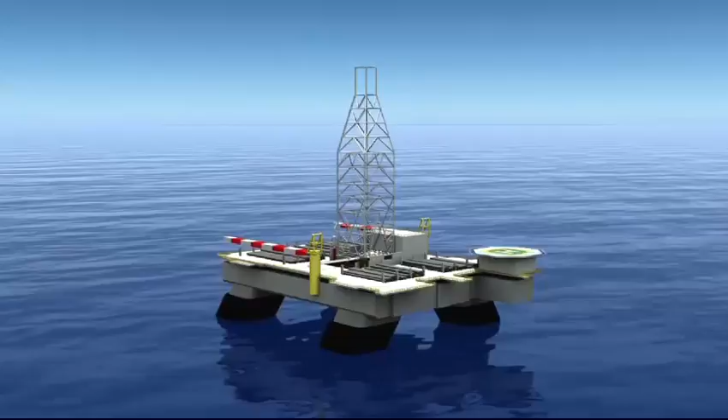This video summarizes the findings and analysis of this investigation team. As I review these, it's important to keep in mind the goals of the investigation. Our team was assembled immediately after April 20th in order to identify the critical factors underlying the accident.

Our mandate was to determine what happened so that BP could take whatever steps necessary to prevent a similar accident from ever happening again. Our purpose was not to apportion blame or liability, but rather to learn, recommend areas for improvement, and share our lessons with others.

While I believe we had sufficient evidence to reach the findings summarized here, our work was limited by a lack of direct access to some witnesses and to certain physical evidence. I will be presenting our findings factually, but it's important to note that our purpose was not to create a record that would serve as the definitive or final word on what happened.

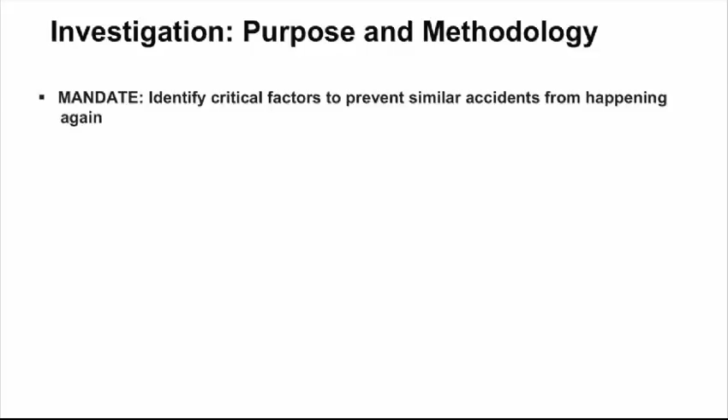The investigation team consisted of more than 50 internal and external engineering specialists with expertise in various aspects of deepwater drilling and exploration. We worked over a 4-month period examining all available evidence.

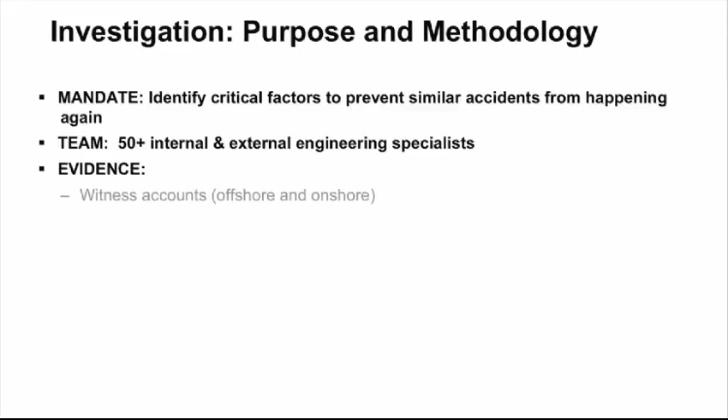This visual portrayal of our key findings is best viewed in the context of the report, which describes more fully the basis for findings. The findings were based on witness accounts, analysis and modeling, as well as engineering drawings, real-time data from the Deepwater Horizon, physical evidence, and testimony gathered from governmental inquiries.

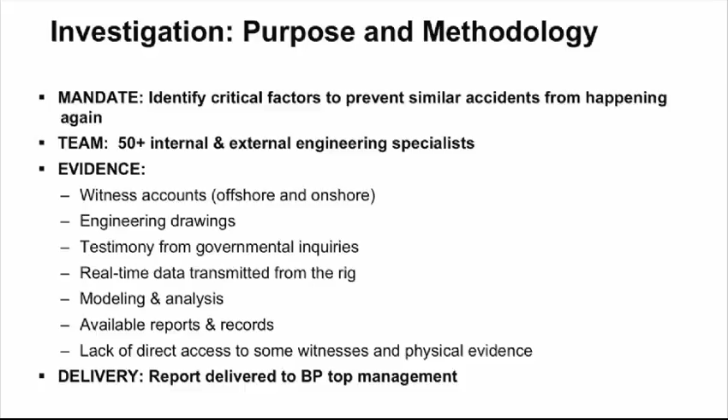The team's report was delivered to the board and BP's top management. They are sharing it publicly in order to keep the public informed, to assist with the government's various investigations, and to ensure that BP and the industry can learn from the accident and take appropriate actions going forward.

To determine what led to the tragedy, it's important to first understand the events that occurred aboard the Deepwater Horizon leading up to the accident.

This short animation depicts the best understanding the team was able to reach about the chronology of key events as we understand them today. This is an animated reconstruction of the tragic accident aboard the Deepwater Horizon on April 20th, 2010. This narrative has been developed to illustrate what we determined were the key events related to the accident. The animation contained in this narrative is representative and for illustrative purposes only, and has not been drawn to scale.

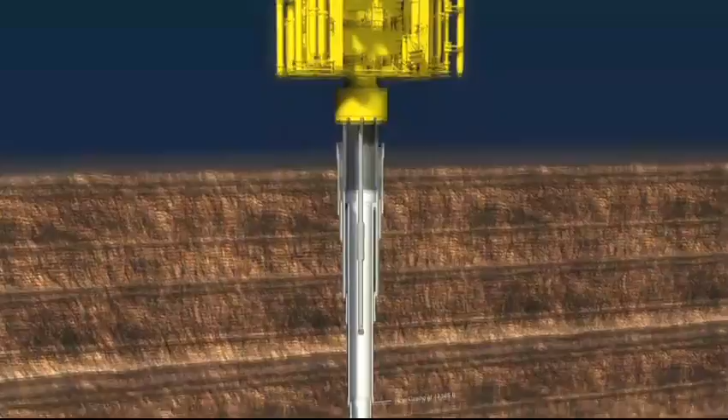The Deepwater Horizon was a dynamically positioned drilling vessel whose construction was finished in 2001. It was designed to drill in water depths up to 10,000 feet. The vessel arrived on the Macondo location on January 31st, 2010, to finish the exploratory well that had been started earlier by its sister vessel.

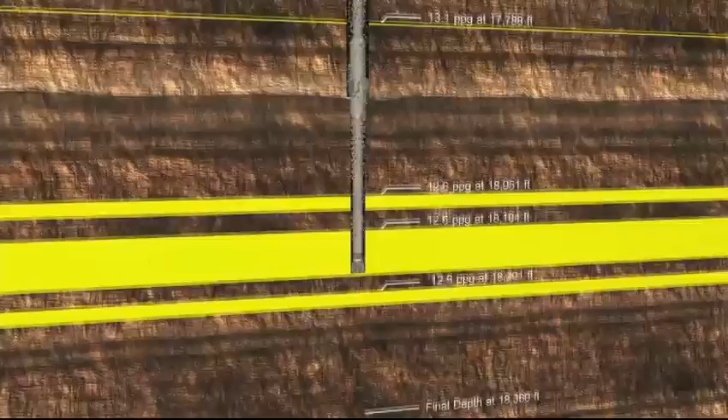The riser and the BOP were installed successfully. 4 casing strings were installed over a 2.5-month period. Our narrative begins on April 9, 2010. The final hole section of the well was drilled to a total depth of 18,360 feet. The long string production casing was installed.

During the afternoon of April 19th, the cement job started. Cement is used as a barrier to seal the wellbore from the reservoir sand. Nitrified foam cement was pumped into the annulus and non-foam cement was pumped into the shoe track. At this point, the pump pressure was bled off, and it appeared that the check valves in the float collar were holding. It's now the morning of April 20th.

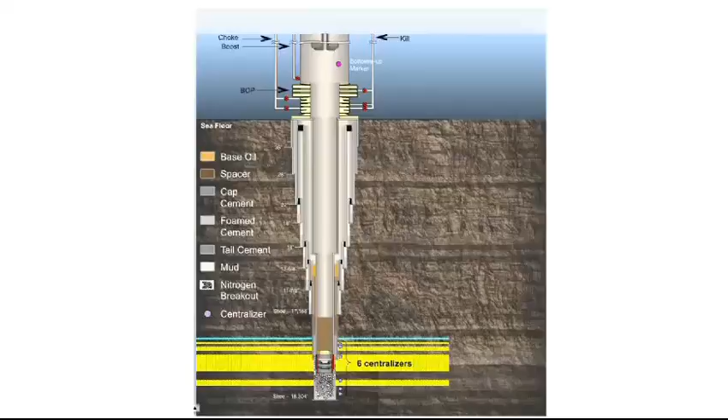The wellhead seal assembly was installed and tested. A positive pressure test, which is the first integrity test of the well, was conducted by closing the blind shear rams and applying 2,700 psi of pressure. The test confirmed integrity of the blind shear rams, the seal assembly, casing, and top wiper plug. The shoe track, which also plays a key role in isolating hydrocarbons, is not tested because of the presence of the top wiper plug. It's now early afternoon.

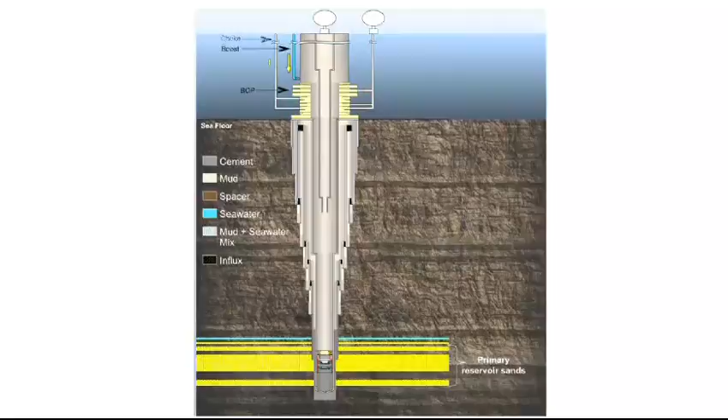The drill pipe was run to 8,367 feet in preparation for the negative test, which was the second test of the well's integrity. The test's purpose was to place the well in a controlled, underbalanced state to test all mechanical barriers. It was conducted by displacing some of the mud in the well with a spacer followed by seawater.

After displacement, the upper annular preventer was closed. An attempt to bleed the system down to 0 psi was made, but fluid in the riser was leaking past the annular preventer.

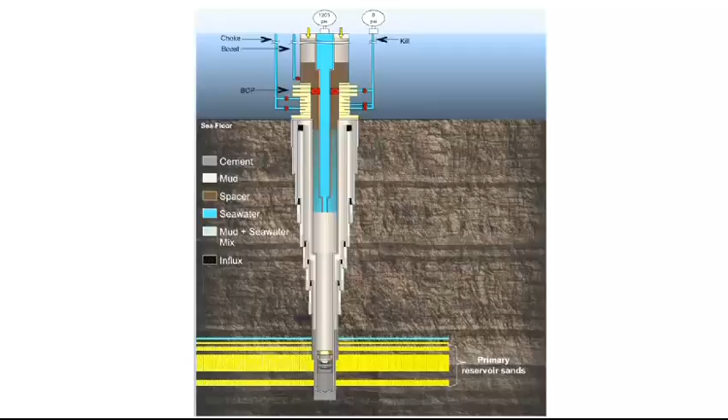It's now 1708. The hydraulic closing pressure for the annular preventer was increased to 1900 psi in order to create a tighter seal against the drill pipe. The riser was filled with an estimated 50 barrels of mud to replace the volume that had leaked past the annular. At 1727, the drill pipe valve was opened and the pressure reduced to 0 by bleeding off 15 to 23 barrels of seawater. It's now 1735.

The well site leader advised the rig crew that the negative test procedure needed to be conducted on the kill line to meet permit requirements. The drill pipe valve was closed and the testing reconfigured for flow to be monitored on the kill line. At 1752, the kill line valve was opened.

Based on eyewitness accounts, somewhere between 3 and 15 barrels of seawater were bled off. The kill line valve was closed and the drill pipe pressure gradually increased. It's now 1842. Seawater was pumped into the kill line to confirm that it was full. The kill line was routed to the mini trip tank, and less than 1 barrel was bled from the kill line. The flow stopped. The kill line was monitored for 30 minutes and showed no flow, but the drill pipe pressure remained at 1400 psi.

A discussion about the source of the 1400 psi took place. It was explained as a phenomenon called the bladder effect. The test was deemed successful.

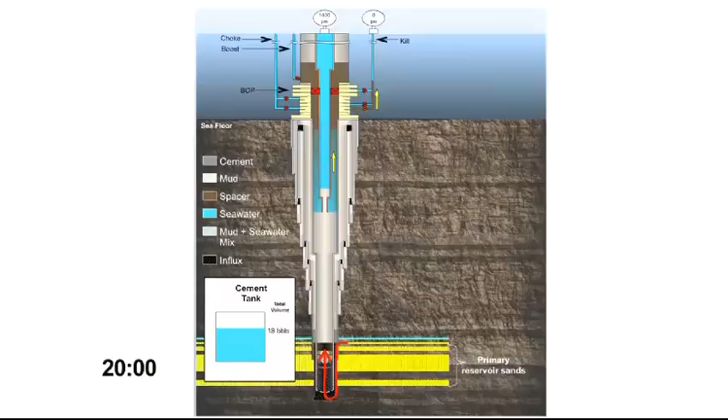It's now 2000 hours. As part of the normal operations to temporarily abandon the well, the crew began to displace the remaining drilling fluid with seawater. To start this operation, the annular preventer was opened and the well returned to an overbalanced condition, preventing further influx into the wellbore. The displacement continued as planned and the well went underbalanced at 2052.

This means the pressure in the well dropped below the reservoir pressure. The well started to flow. It's now 2101. The crew was emptying the trip tank, which likely masked any flow indications on the flow meter.

At this point, with constant pump rate, pressure should have declined as the heavier mud was being replaced with lighter seawater. Instead, drill pipe pressure increased by 100 psi, indicating a problem with the well. Analysis of real-time data shows that a 39-barrel gain was taken by 2108.

It was then time for the sheen test on the spacer, which is done in order to check that there is no free oil in the fluid that will be discharged to the sea. The pumps were shut down when the spacer reached the surface. A sheen test was performed, and the spacer was determined to be suitable for discharging overboard.

The drill pipe pressure increased by 246 psi in 5.5 minutes while the pumps were off. The fluid returned from the riser was routed to the overboard dump line. During this period, our modeling suggests that the well was flowing at an estimated 9 barrels per minute.

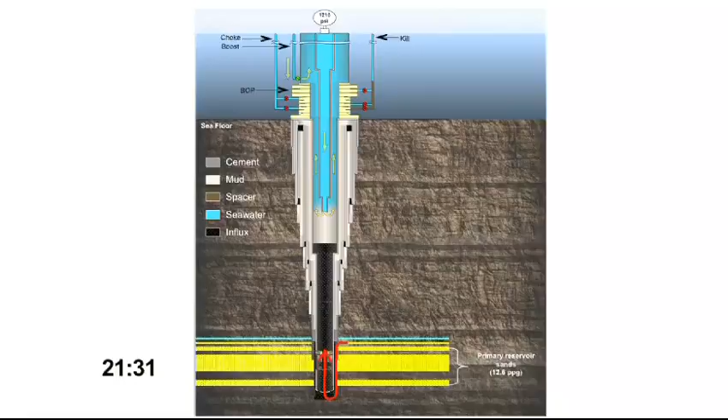Displacement of the mud with seawater resumed at 2114. It's now 2131. All mud pumps were shut down. An estimated 300-barrel gain has been taken. Over the next 5 minutes, the drill pipe pressure increased by 556 psi.

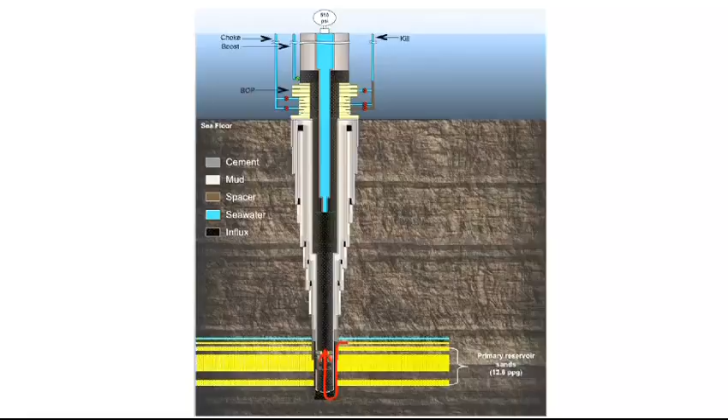Rig personnel discussed the differential pressure on the drill pipe. In the next 2 minutes, it appears an attempt was made to bleed the drill pipe, possibly to investigate the differential pressure. Over the next 20 minutes, a series of critical well control events occurred, ending in the order to abandon ship. It's now 2140.

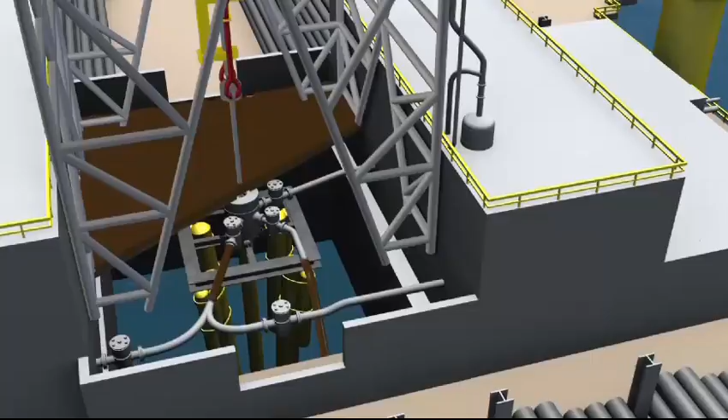Mud overflowed onto the rig floor. A minute later, the mud shot up through the derrick. The diverter was closed and flow was diverted to the mud gas separator.

At about the same time, the rig crew appeared to close an annular preventer and drill pipe pressure increased steadily from 338 psi to 1200 psi over a 5-minute period. Mud and hydrocarbons discharged onto the rig and overboard.

Activation of the annular preventer appears to have failed to seal the annulus. It's now 2147. The first gas alarm sounded. A cloud of gas spread, setting off other gas alarms. There was a roaring noise and the vessel vibrated.

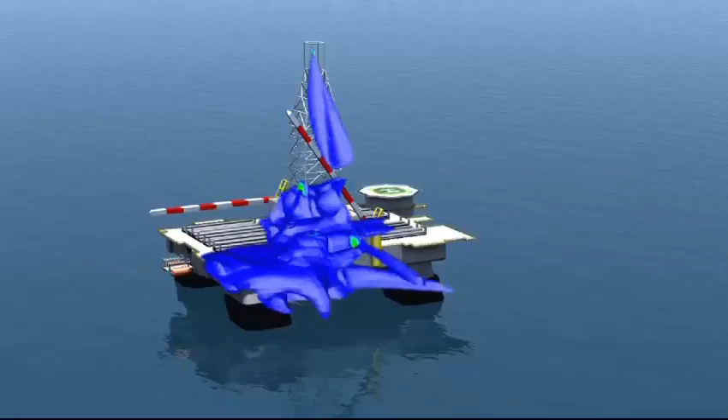The drill pipe pressure rapidly increased to 5,730 psi, which is thought to be the result of the BOP sealing around the drill pipe, likely after activation of the variable bore rams or the annular preventer fully sealing.

1 minute later, the combustible gas cloud reached the aft starboard quadrant of the main deck and probably entered the air intakes for the engine room. Gas also dispersed under the deck and into the engine room enclosures. The main power generation engines went into overspeed.

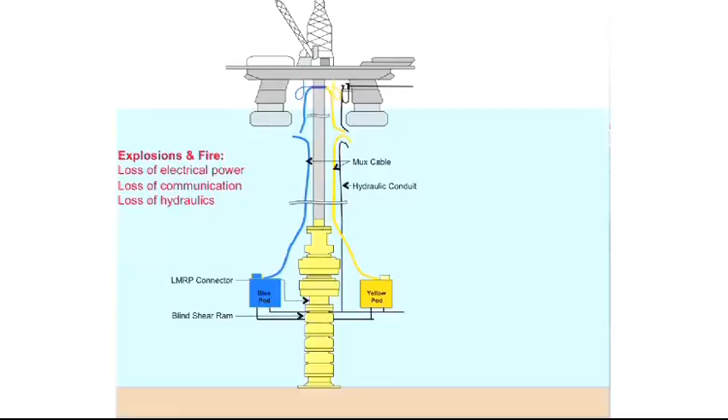Within another minute, electrical power was lost and there were 2 explosions. The first occurred at about the same time as the power loss. The second occurred an estimated 10 seconds later. The second explosion appears to have taken place under the main deck in the aft starboard quadrant of the rig.

The associated blast pressure wave traveled forward and caused extensive damage to the starboard side, potentially damaging the MUX cables, which allow the vessel to communicate with the BOP. The hydraulic line which powers the BOP may also have been damaged. The fire and explosions may also have caused damage to the surface drill pipe equipment, resulting in hydrocarbons flowing to the surface through the drill pipe.

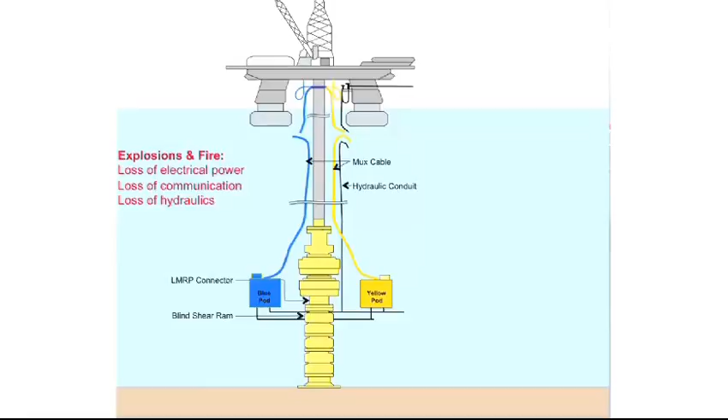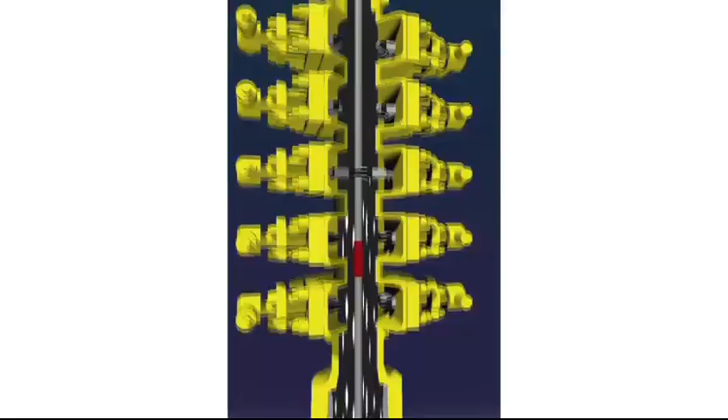The valve on the drill pipe was left open, exposing surface components to high shut-in pressure. While the BOP had closed around the drill pipe, it did not seal the well, and the subsequent loss of power may have resulted in the rig drifting off station. The drifting rig may have broken the BOP seal around the drill pipe and allowed hydrocarbons to continue to flow up the riser. One or a combination of these events ultimately allowed the fire to be continually fed.

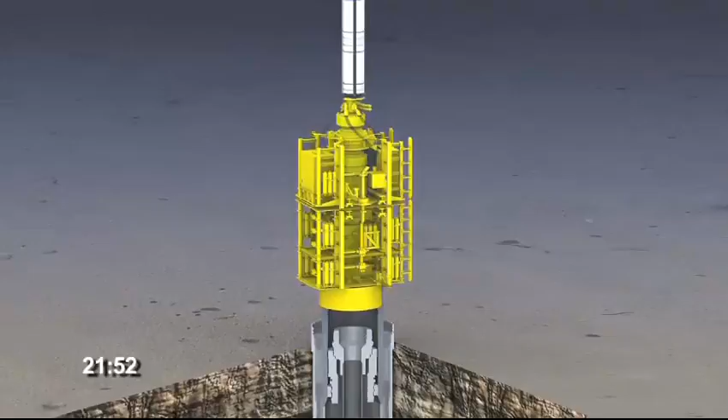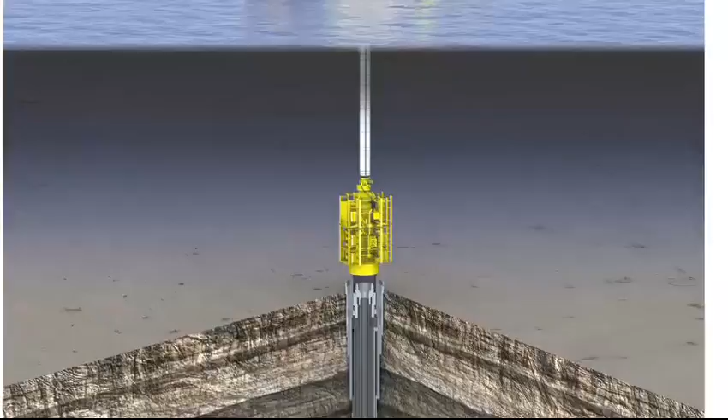It's now 21:52. Over the next 5 minutes, personnel attempted to shut in the well and disconnect the lower marine riser package from the BOP stack. The emergency disconnect sequence for the BOP was activated from the bridge. While lights changed on the control panel, no flow was observed on the flow meters. It appears that the emergency disconnect system did not function. The lower marine riser package failed to unlatch from the BOP, and the BOP did not seal the well. With the Deepwater Horizon unable to disconnect from the well, the order to abandon ship was given at 2200 hours.

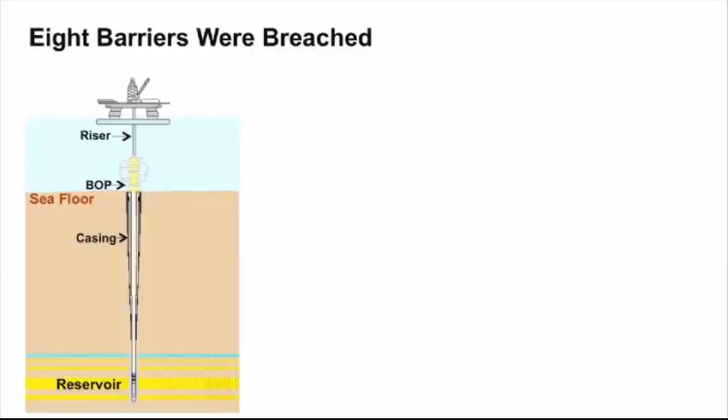This animated chronology has shown what we believe happened. Now we'll turn to an analysis identifying the contributing factors. As you'll see, we concluded that there was no single action or inaction that caused the accident. Instead, we found that there were 8 interrelated and contributing factors that led to this tragedy.

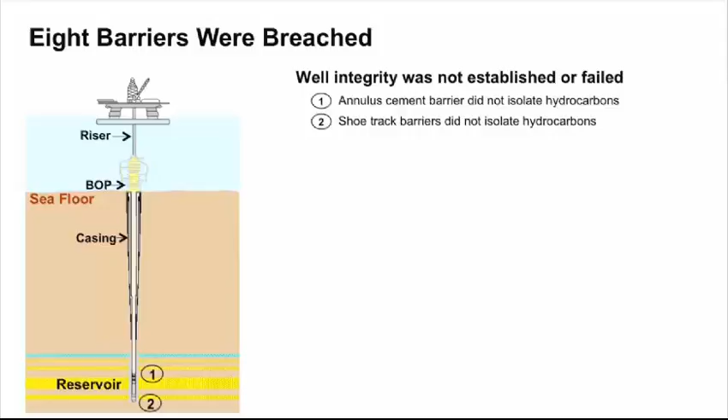The first 2 findings of the investigation relate to hydrocarbons entering the well. We believe that the evidence shows that both the annulus cement barrier and the shoe track barriers did not isolate the hydrocarbons, allowing them to flow up the wellbore.

The next 3 findings stem from evidence that the rig crew did not observe or recognize that hydrocarbons had entered the well before appropriate steps could be taken to contain them. The negative pressure test conducted in order to confirm well integrity was incorrectly accepted. An influx of hydrocarbons was not recognized until it was too late to prevent the hydrocarbons from reaching the surface because they had already entered the riser. And well control response actions failed to seal and regain control of the well.

Our 6th and 7th findings relate to evidence that hydrocarbons came up through the riser and were dispersed across the vessel, creating the conditions for them to ignite. We found that the well flow was diverted to the rig's mud gas separator, causing gas to be vented onto the vessel rather than being diverted overboard. Then, the vessel's fire and gas system did not prevent hydrocarbon ignition.

Our 8th and final finding was drawn from evidence relating to the blowout preventer. With the loss of well control and subsequent explosions and fires, the BOP did not seal the well. Each of these findings is explained in greater detail throughout the remainder of this presentation.

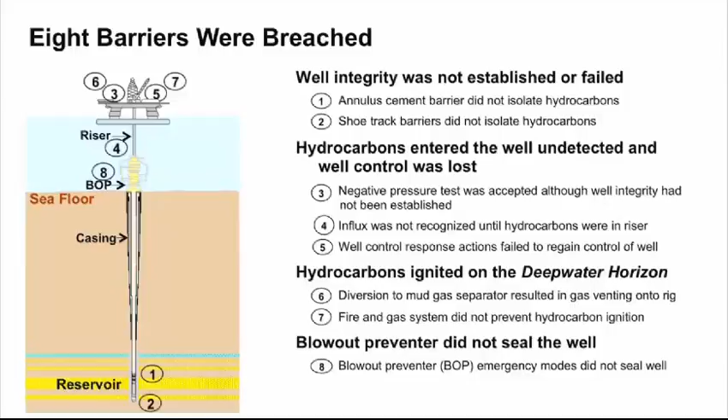Our first key finding relates to the cement job. BP relied on the expertise of Halliburton, the cementing services provider, to recommend a cement slurry appropriate for this well. The BP team was responsible for assuring Halliburton's work and accepting its proposal.

It was clear from the event that the cement did not isolate the hydrocarbons. The challenge facing the investigation team was to determine what happened without access to actual samples of the cement slurry used in the Macondo well. Therefore, we had an independent laboratory analyze the slurry design and also create and test samples based on that design.

Through our investigation of the cement job, we noted the following critical items. First, the high percentage of nitrogen in the foam cement made it difficult to create a stable foam slurry. Second, there were no fluid loss additives used in the entire cement slurry. Third, a relatively small amount of cement was pumped in relation to the displacement volume, increasing the likelihood of cement contamination. And fourth, Halliburton did not conduct comprehensive lab tests that could have identified potential problems with the cement.

The independent laboratory constructed representative cement samples based on the slurry design and demonstrated that cement stability could not be achieved. Therefore, we've concluded that the foam slurry likely experienced nitrogen breakout, resulting in nitrogen migration, slurry contamination, and incorrect cement density. Our investigation of the cement job also included an analysis of BP's decision to use 6 centralizers and a long string production casing in the well.

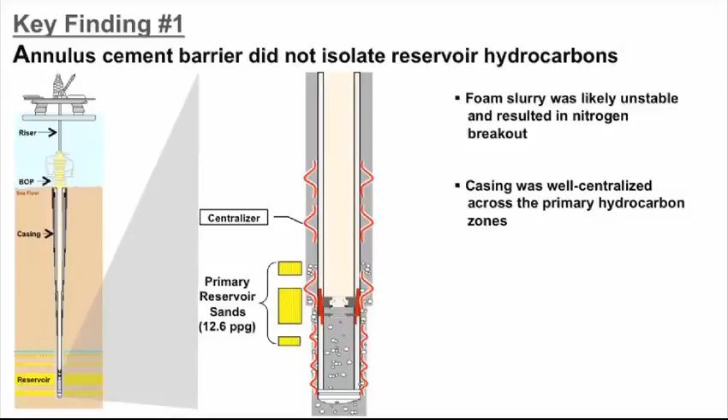The investigation team's next task was to determine the actual point of entry for hydrocarbons into the well. We examined and analyzed every plausible entry point. As a result, our second key finding is that the initial hydrocarbon entry occurred at the shoe track and that its mechanical barriers therefore did not isolate the hydrocarbons. Our conclusion is based in part on hydrostatic pressure calculations, well flow modeling, and an analysis of data recorded during the successful static kill of the Macondo well.

The shoe track has 2 types of mechanical barriers: the cement in the shoe track and the double check valves in the float collar. The investigation team believes that the shoe track cement failed to act as a barrier. The team has not established whether this failure was attributable to the design of the cement, contamination of the cement by mud in the wellbore, commingling of the cement with nitrogen due to nitrogen breakout from the foam cement, swapping of the shoe track cement with the mud in the bottom of the well, or some combination of these factors.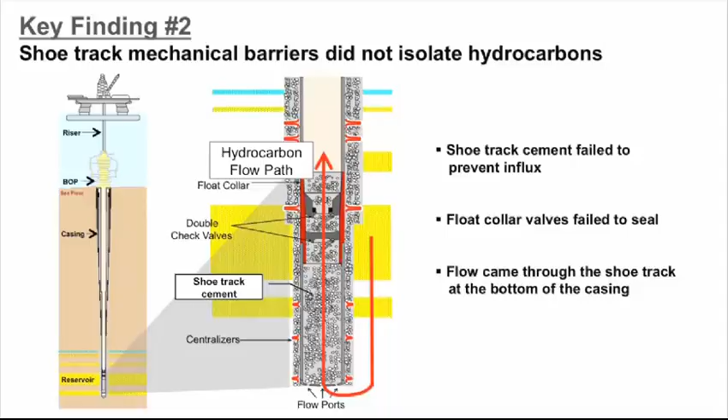Hydrocarbons were able to bypass the float collar check valves because they were damaged, they never properly converted, or they simply failed to seal. The evidence shows that the flow came up through the shoe track at the bottom of the production casing. Therefore, the decision to use 6 centralizers likely did not contribute to the outcome.

The third key finding is that the negative pressure test was accepted, even though well integrity had not been established. The negative test was conducted to confirm the integrity of the annulus cement, shoe track, casing, and wellhead seal assembly. Looking back, the investigation team believes there were several issues associated with this negative test.

First, at the start of the test, the annular preventer allowed approximately 50 barrels of spacer to pass into the BOP. This may have inhibited the pressure readings on the kill line.

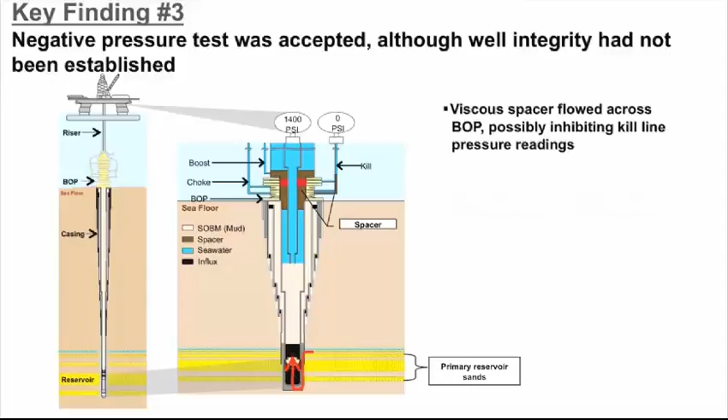Second, the bleed-off volumes we examined were in excess of what should have been expected, indicating communication with the reservoir through failed barriers.

And third, rig personnel found that drill pipe pressure had increased to 1,400 psi with no flow on the kill line. The investigation team believes this reading should have resulted in further inquiry into the well's integrity. Instead, the abnormal pressure was attributed to a phenomenon called the bladder effect.

Ultimately, the negative test was incorrectly deemed a success by BP and Transocean rig personnel. A more detailed procedure would have helped BP and Transocean personnel to implement and interpret the negative test.

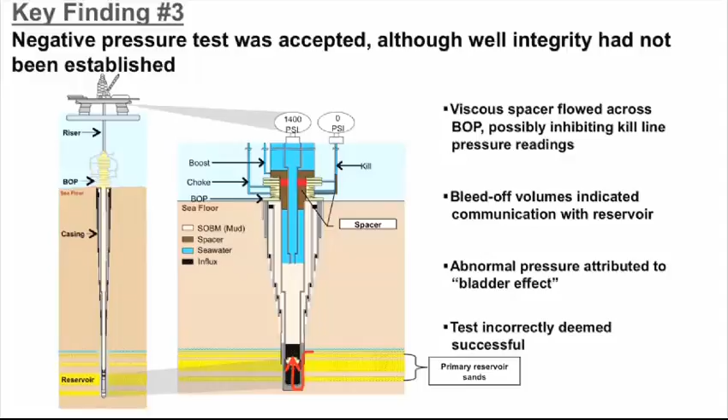The investigation's fourth key finding is that the influx of hydrocarbons into the well was not recognized until it had entered the riser. Well control principles rely on early influx detection and effective response. The investigation team examined real-time data from the rig, conducted dynamic flow modeling, and reviewed witness accounts in order to reconstruct the key indications of flow that we believe were not observed or recognized.

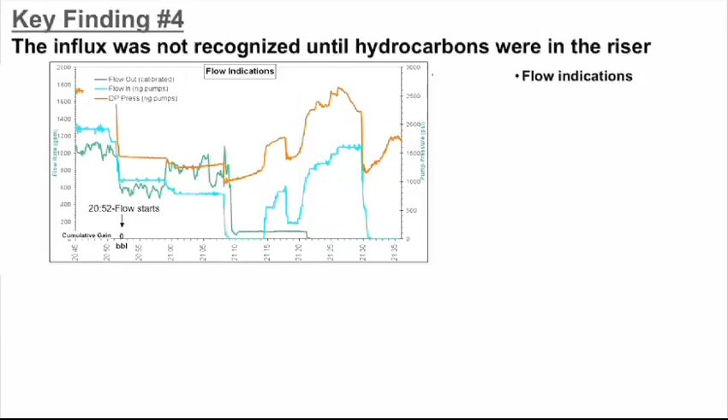It appears that there were a number of indicators of hydrocarbon influx that went unobserved or unrecognized. First, from 2058 to 2108, the drill pipe pressure should have decreased. Instead, drill pipe pressure increased by 100 psi at a constant pump rate starting at 2101. By 2108, a 39-barrel gain had been taken.

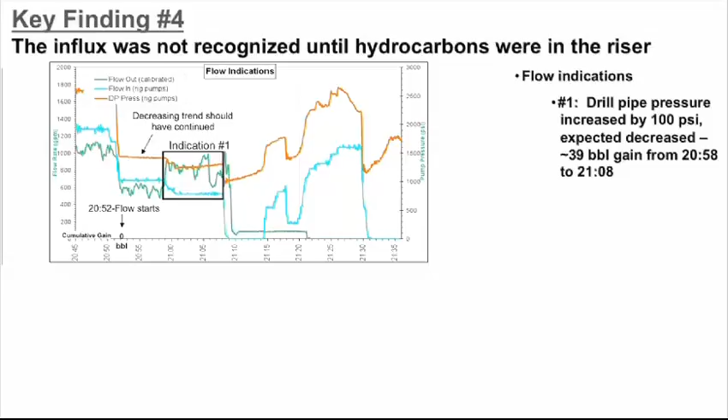Second, from 2108 to 2114, the drill pipe pressure increased by 246 psi with the pumps off. Pressure should not have changed during this period.

And third, by 2131, an estimated 300-barrel gain had been taken. Over the next 5 minutes, the drill pipe pressure increased by 556 psi, again with the pumps off. These indicators should have been observable, but it appears the first well control actions were not taken until about 2141, by which time an estimated 1,000-barrel gain had been taken.

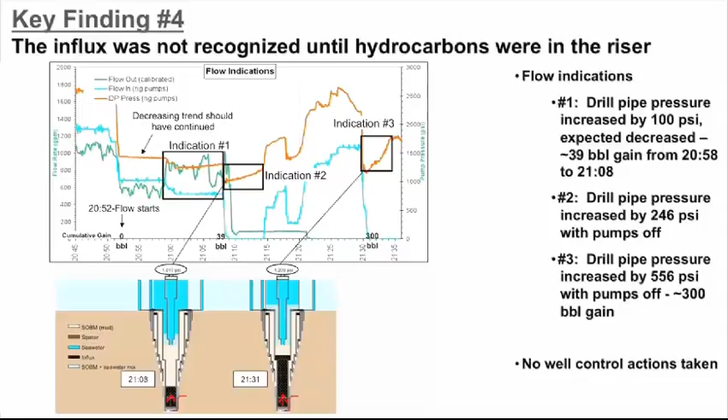The investigation team has not reached a conclusion as to why these indicators were not observed or recognized. We note, however, that simultaneous operations were occurring on board the vessel at this time, including mud pit cleaning and mud pit transfers, which may have masked the indications of a hydrocarbon influx.

The fifth key finding is that well control response actions did not regain control of the well. Upon recognizing an influx, the well must be shut in, and if necessary, hydrocarbons diverted safely away from the vessel. The investigation team believes that the response on April 20th was not typical of a rig crew that was aware that a significant well control event was occurring.

For example, in retrospect, there was about a 40-minute gap between the first indication of hydrocarbon influx and the first well control response. Roughly 8 minutes later, the first explosion occurred. When action was taken, the diverter was closed and the flow was routed to the mud gas separator. Also, at that point in time, it appears that an annular preventer was activated, but apparently did not immediately seal.

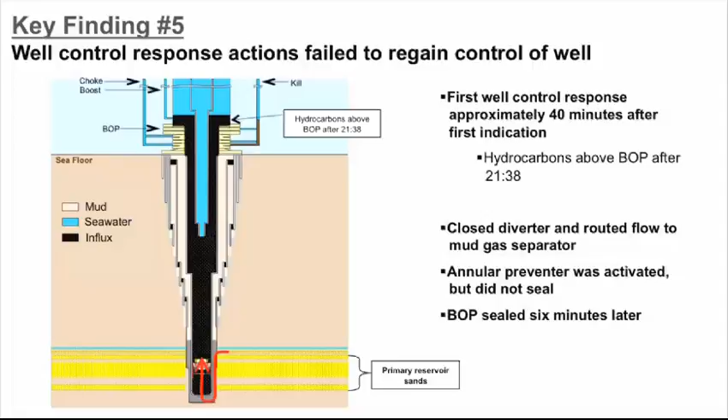The BOP sealed about 6 minutes later. The investigation team believes that the time for effective emergency response was significantly shortened because initial indications that hydrocarbon had entered the well went unobserved or unrecognized.

The sixth key finding is that the diversion of hydrocarbons to the mud gas separator resulted in gas venting onto the rig. In a well control event, the riser diverter can be closed and the fluids directed to either the overboard diverter lines or the mud gas separator. Based on testimony and interviews and an analysis of photographs and well flow data, we believe the flow was diverted to the mud gas separator.

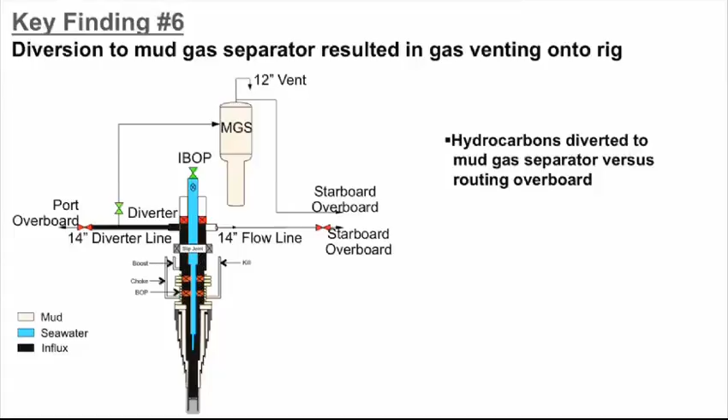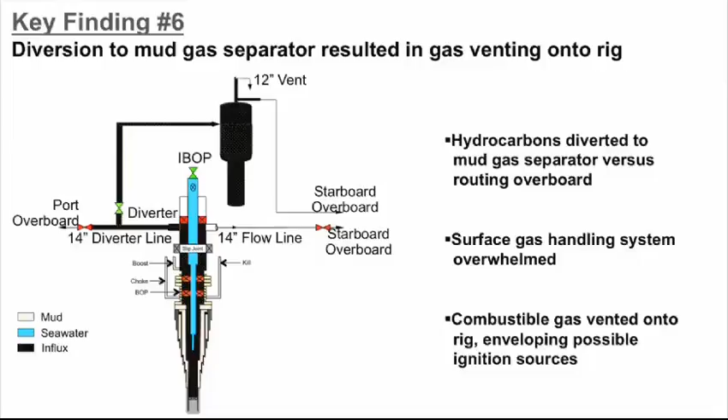The mud gas separator is designed to remove small amounts of entrained gas, but not the significant volumes experienced here. Large volumes would generally be expected to be sent overboard via the 14-inch diverter line. As gas dispersed across the vessel, potential ignition sources were enveloped in a flammable vapor cloud.

The seventh key finding is that the fire and gas system on the Deepwater Horizon did not prevent hydrocarbon ignition. Gas dispersion modeling conducted by the investigation team shows that rapid spread of gas across the vessel covered the main deck and moon pool areas, overwhelming the secondary protective devices. The investigation team believes that the gas likely entered the engine rooms through the main deck air intakes, resulting in engines going into overspeed. These engines were one potential source of ignition.

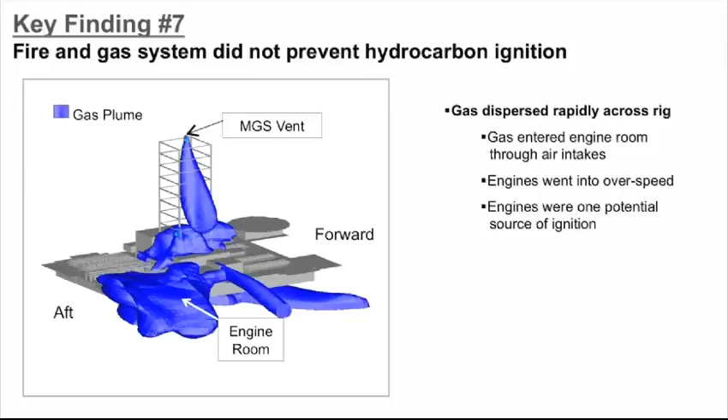The eighth and final key finding is that the blowout preventer did not seal the well. The investigation focused on the BOP's emergency systems and why they failed to seal the well after the initial explosion. The investigation team identified issues that we believe interfered with the operation of the BOP.

First, the initial explosions and fire damaged the control cables, called MUX cables, and the hydraulic lines. The MUX cables are critical to BOP operation because they provide electronic communication and electrical power to the BOP control pods. This is likely why the emergency disconnect system failed to activate the blind shear ram when it was triggered by personnel on the bridge of the Deepwater Horizon.

Second, we believe, based on testing done at the direction of Transocean, after both control pods had been retrieved, that the automatic mode function, or AMF sequence, did not complete. The AMF should have activated automatically, without crew intervention, when the MUX cables and hydraulic line were damaged. At least one operational control pod was required to activate the AMF. However, based on testing, there was a defective solenoid valve in one control pod and insufficient charge on the batteries in the other control pod.

We believe that the ROV intervention to simulate auto shear conditions likely activated the blind shear rams, but they failed to seal the well and hydrocarbons continued to flow. The investigation team has not determined the reasons for the failure of the blind shear rams to seal.

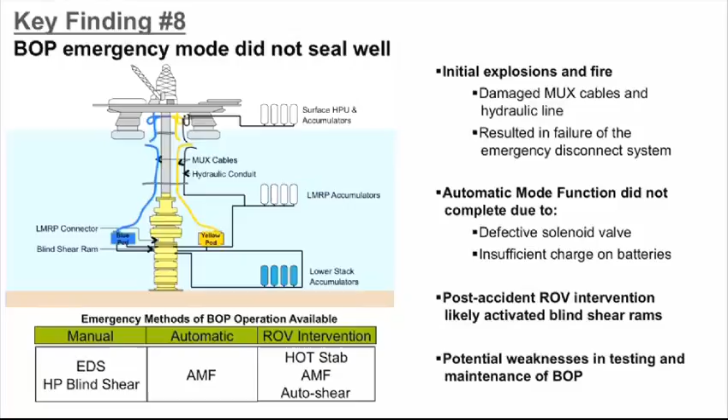Presence of non-shearable pipe across the blind shear ram, insufficient hydraulic power subsea, and prevailing flow conditions are among the potential causes of failure. The investigation team also found indications of potential weaknesses in the testing regime and maintenance management system for the BOP. The BOP is a complex device, and more may be known when it is fully examined.

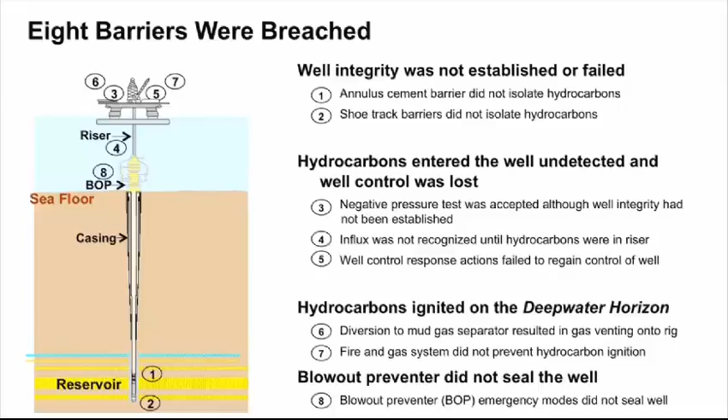In summary, as I noted at the outset, the investigation team concluded that there is no single action or inaction that caused the Deepwater Horizon accident. 8 safety barriers were breached. The accident was the culmination of a complex and interlinked series of mechanical failures, human judgments, engineering design, operational implementation, and team communication. These involved a number of companies, including BP.

This presentation of the report's findings is intended as a high-level overview. The full report is available on BP's website. BP's senior management has accepted all of the team's recommendations, which address changes that should be made in drilling and well operations, as well as contractor and service provider oversight.

Finally, in the course of conducting the investigation, the team learned of many brave acts by people on the night of the accident. I would like to close by recognizing those individuals for the lives they undoubtedly saved, and by extending our sympathies to the families of the 11 men who died that night, and to the communities subsequently affected by the spill.